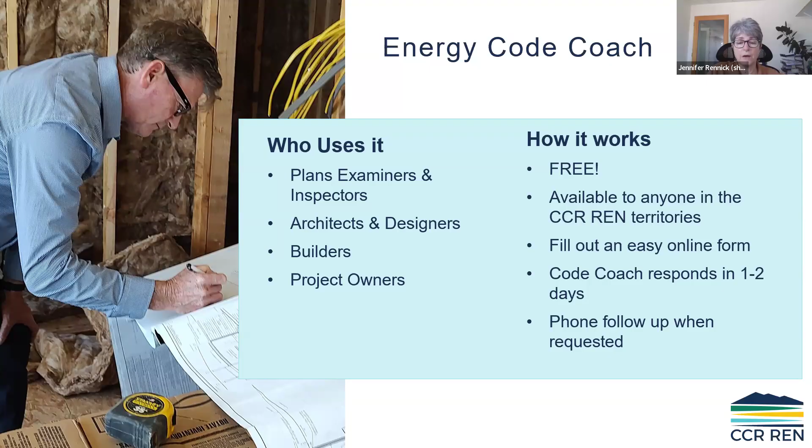And one of the ways we do that is through our Energy Code Coach program. And that Code Coach program is available to plans examiners, inspectors, architects, designers, builders, project owners, including homeowners and the general public. It's completely free and it is easy to use. You fill out a form online. I'll have a website link at the end of the presentation. Then we'll respond back to you in 1 to 2 days through the Code Coach service. And we can also do a phone call follow-up when requested.

This service is available because a little bit of your ratepayer dollars, when you pay your electric utility bill, goes into a pool of money that then is distributed back to each of these regional energy network service areas to provide education, outreach, and support on the energy code as California moves towards reducing its energy impact and reducing pollution for the greater good of California and the adjoining states, and a little bit of Mexico and a little bit of Canada as well.

Today, we're going to cover accessory dwelling units and give you an overview. Then I'm going to go into the California Energy Code and specifically some of the big picture code review. Then we're going to talk about energy code measures that are applicable to new construction and additions, alterations, with a focus on how that might impact your ADU or junior ADU project. And then I'll wrap up with some additional resources.

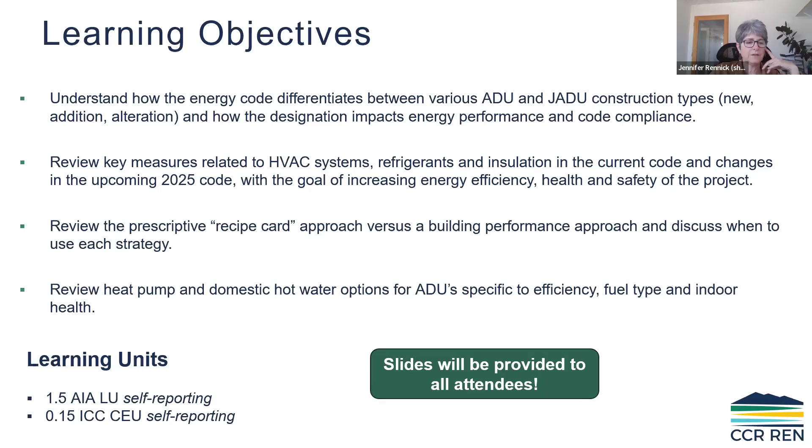Let's see, before we dive into the overview, did anyone put in the chat if they were architects or just interested in ADUs? What did we find out? Yeah, we have 1 design professional and we have 4 jurisdiction staff.

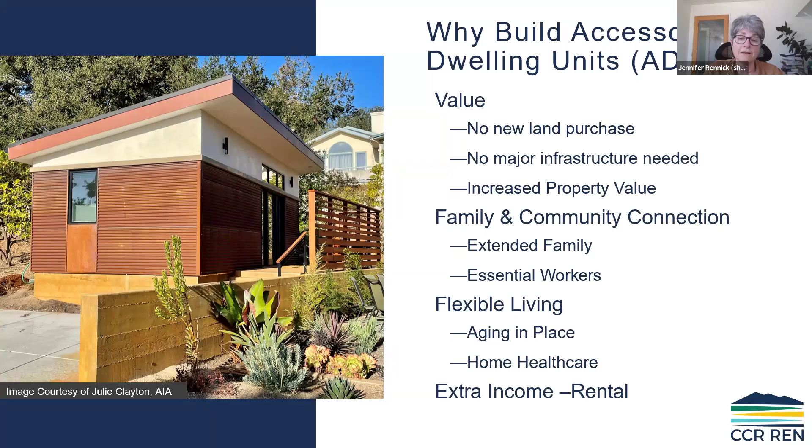Okay. So in general, and you all may know this, a lot of times when we're interfacing with the general public, a lot of the reasons they want to build ADUs is because they don't have to purchase new land. They don't have to have new major infrastructure. It increases their property value. A lot of times folks want additional rental income, but we're seeing more and more people just need an affordable way to live for their extended family. And sometimes they need a flexible living space because they're aging in place.

And as most of you probably know, California adopted legislation to address our housing needs. So California Code, beginning January 2025, mandated that all jurisdictions have pre-approved accessory dwelling unit plans available to the public. And SB 9, housing development, allowed for a second primary dwelling unit and allowed qualifying properties to be subdivided. So what that really did in the end was for certain properties, you could end up with 4 dwelling units total. So the state is looking for ways to help people build more affordable housing, is what this really comes down to.

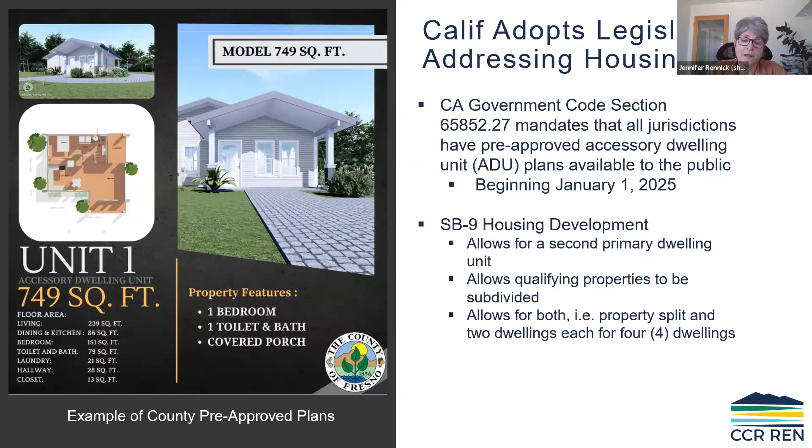So this is an example here from County of Fresno for their pre-approved plan sets. And there's a lot of resources available. What I have found is some cross-pollination between jurisdictions, but also for the design professionals. I found it helpful to take a look at what some of the other counties or cities have put together just as resources. So for example, Kern County, they have 8 pages of required code notes that folks should put on ADU plan sets. And so Kern County has made an effort to streamline that process and get these notes up front and out there for the people that are building it, and also for the homeowner and everyone involved to know what's going to be really required for that ADU.

And of course, there's a great ADU accessory dwelling handbook. It was updated January 2025, and you can get that on the hcd.ca.gov website.

So California Energy Code, to put this in perspective, big picture, in the California Code of Regulations we have 28 titles. Title 24 is the Building Code Standards. The Energy Code is Part 6. It's just one part of it. But when it comes to ADUs and housing, Title 20 plays a part with the efficiency standards for our appliances, and Title 25 can play a part with housing and community development if folks are buying pre-made factory-built ADUs and having them craned in, for example.

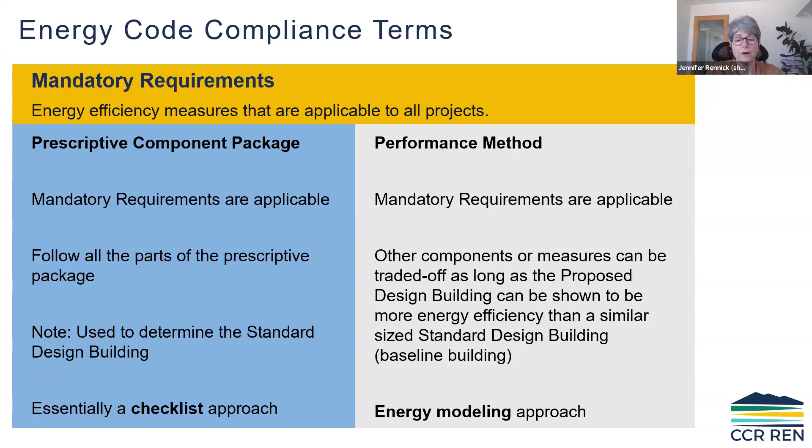When it comes to the ADUs, if it's a pre-approved plan set, all this has been figured out. What we're seeing is some homeowners wanting to change things and then being surprised that they're being asked to find a Title 24 energy consultant to update or create a new Title 24 Part 6 plan set for them.

In the rural REN, Central California Rural REN regions, we have multiple climate zones. A lot of times folks will look at pre-approved plans, and depending on where that plan set comes from, they're supposed to use the one that's in their jurisdiction, but maybe they're getting ideas from other plan sets. We've seen this in some of the other RENs, that they're surprised to see those requirements. A lot of times it's because the energy code itself is climate specific.

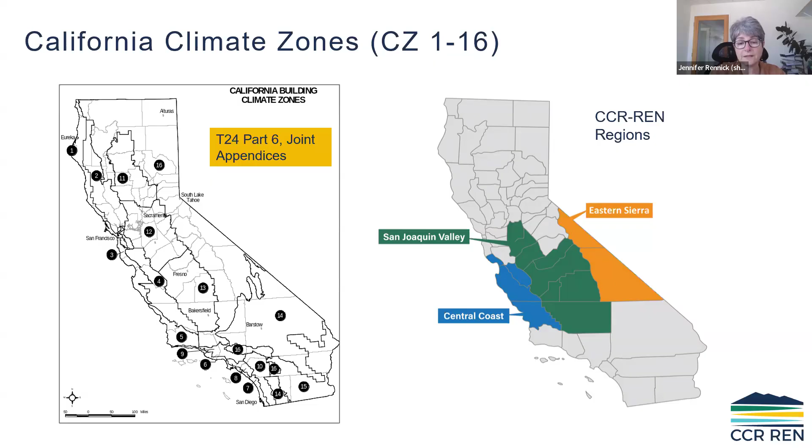In California, we have 16 climate zones. In our rural REN, we've got climate zones 3, 4, 5 down in the San Luis Obispo area, 12, 13, 14, and 16. So many different climate zones, and we're going to have a variety of solutions across each of those counties and cities within this region. If you're not sure what climate zone a project is in, there's a great California climate zone tool where you can type in the address, and it will tell you exactly what California climate zone you're in.

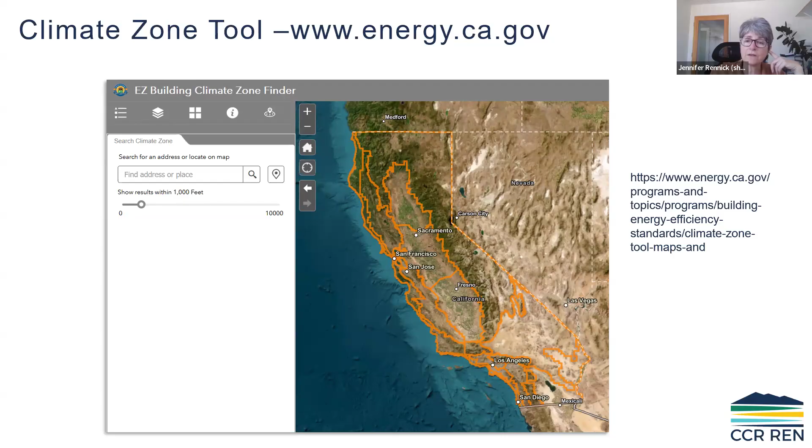For ADUs and junior ADU designation types, that does make a difference in terms of how the energy code applies. By definition, an ADU, accessory dwelling unit, is a complete independent living facility. It has permanent provisions for living, sleeping, eating, cooking, and sanitation, i.e. bathroom. The ADU has to have a separate bathroom facility and a separate kitchen, which can be an efficiency kitchen or a full-size kitchen. It has to have its separate heating, cooling, and ventilation system. An ADU may have shared hot water with the main residence or have its own hot water source.

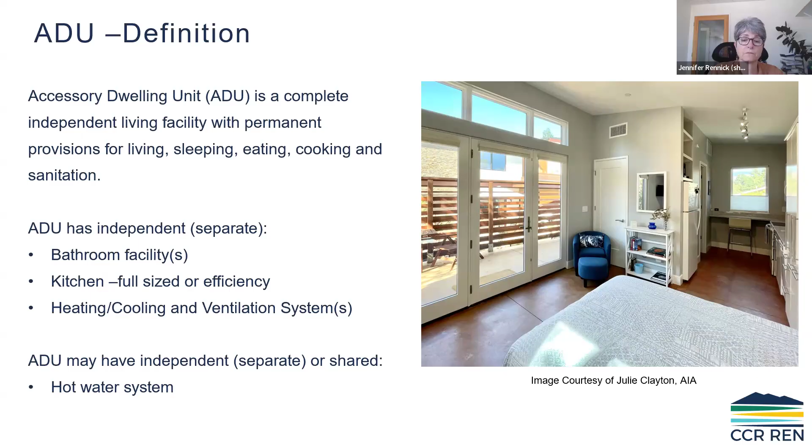A junior ADU, on the other hand, is a living and sleeping space that's no more than 500 square feet, but it's contained within the existing or a new proposed single family residence. It has to have its own kitchen, full-sized or an efficiency kitchen. It has to have its own exterior entrance door, but the big difference is that a junior ADU can share a bathroom facility with the main house. If that's true, it needs an interior access door, and it can share the heating and cooling systems and share the hot water systems.

Just as a reminder, the efficiency kitchens do need to include plug-in cooking appliances, a space for refrigerated food storage, i.e. a refrigerator, and adequate space to actually do the food preparation.

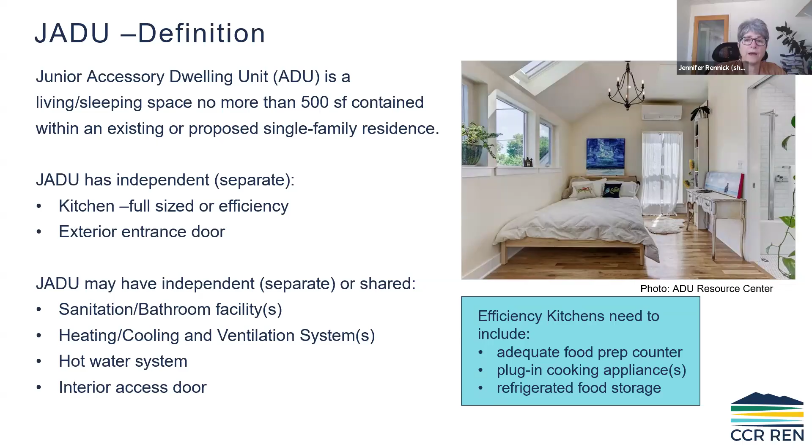Now, in the language of the planning departments, policy and housing regulations, ADUs and JADUs have some common configurations that are talked about. So a lot of the cities and counties have adopted these diagrams that were put together for many of the jurisdictions. And we have a detached ADU, new construction. Okay, great. You could also have an internal JADU that's a converted attic, or it could be a detached ADU that's a garage or shop conversion.

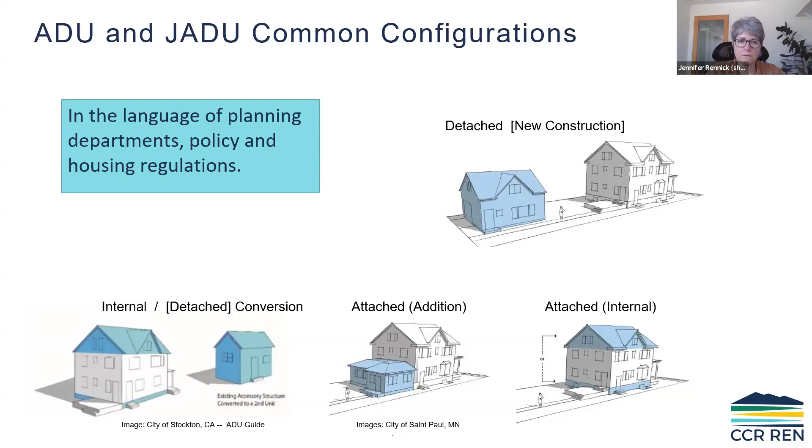So that's how those words are used for planning departments, but in the language of the energy code, a detached ADU that you're building from scratch, that's new construction, just straight up new construction. And so all the things for new construction apply, including PV solar requirements.

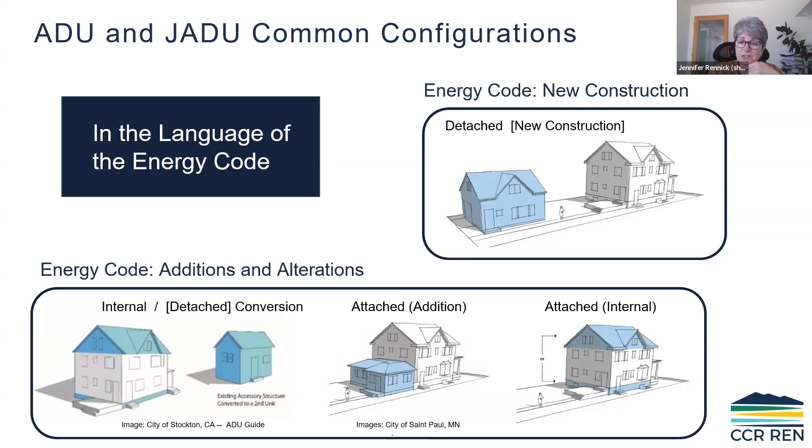The other ways of looking at the building for ADUs, all of those other types, whether conversions or additions or remodels or retrofits, whatever the word you want to put to it, all those types are going to fall under the additions and alterations part of the code. And the requirements are different for each of those.

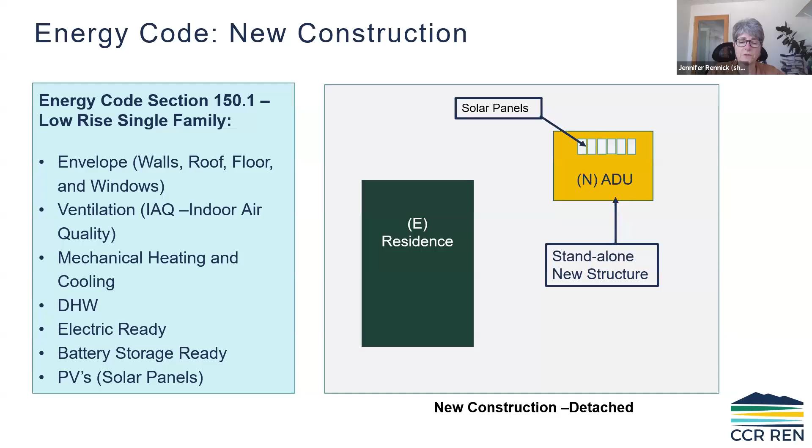So for new construction ADU, there are going to be wall, roof, floor, and window requirements that are slightly different than the additions, alterations. They're going to have an indoor air quality or outside air ventilation system, mechanical heating and cooling. They have to comply with the electric ready and battery infrastructure storage ready requirements, and PV panels could be required depending on the size of the ADU. So we'll review some of those key things that impact ADU for new construction.

And then for the additions, again, even if it's new to the homeowner, if it's an existing structure on the property, like a detached shop or detached garage, and it's converted to an ADU, even though it's not touching the main house, that's still considered an addition under the energy code. And of course, you could just do a straight up addition onto the house, or you could convert a connected garage, and those are still considered additions.

So they have slightly different wall and roof requirements. The ventilation requirement for outside air depends on the size of the addition or the ADU. And you can include a second water heater with that if you want to have the new ADU have its own water heater source.

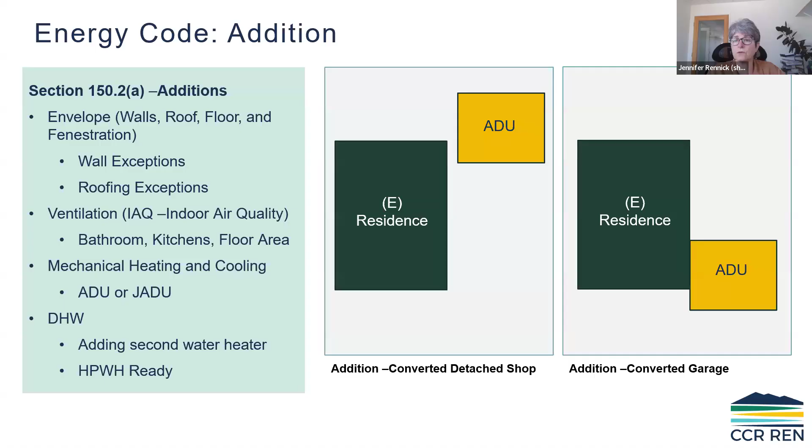Jennifer, one quick question I see in the chat from Tyson. Do junior ADUs require built-in cooking appliances? Plug-in type appliances is how the code reads. But it needs to be appropriate for cooking. And it has to be permanent. So the facility is supposed to be permanent. Does that answer the question? You can use plug-in type.

So I've seen now for the ADU and junior ADU market 2-burner induction cooktops, both a plug-in type, but also a built-in the counter. So it's very narrow and only has the 2 burners. That seems like a really good solution for that. That's readily available at like Ferguson's supply houses.

And then refrigerators are getting more compact, so it doesn't have to be a teeny tiny under the counter refrigerator where you can hardly store any food, but they do make them like 3/4 size now, also readily available with inverter motors and sleek design. So there's some options.

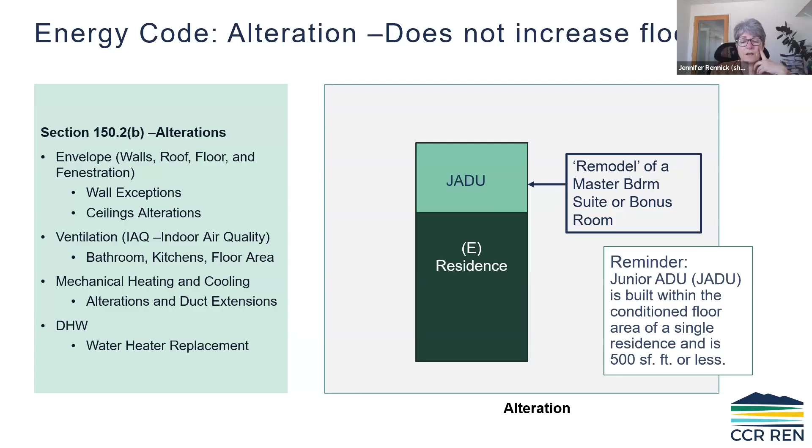But when we do that now, the energy code is only looking at complying with alterations to those walls, ceilings, windows, and domestic hot water, et cetera. If you wanted to, you could do a water heater replacement for the whole house that includes the junior ADU and help offset some of those other features that might come up in an alteration under the performance method. So there's a variety of ways to do that as an alteration.

For new construction, so when we have the standalone detached project, new construction, that ADU does have to comply with electric ready infrastructure. And this only kicks in if the homeowner is wanting to install propane or gas appliances or water heater or furnace. If they choose to do so and they're complying with the rest of the energy code, then the energy code says you have to provide space in your electric panel, or at least designate that, and

you have to supply the electrical infrastructure in order to be able to convert that water heater space to a heat pump water heater, the furnace to a future heat pump installation, your cooktop to a future induction or electric, and dryer to a future electric dryer, of which there are several types: induction, ventless, and your standard vented electric dryer are all possible.

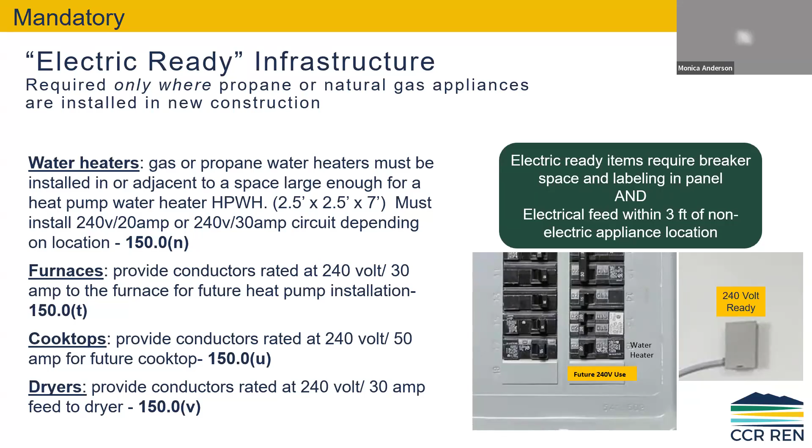Now, along with new construction, you don't have to install a battery, but the infrastructure for future battery energy storage is required. And we get this question that comes up a lot, and so I probably can't say it enough, is it doesn't apply to the additions and it doesn't apply to the alterations. So this is why also how the energy code looks at your ADU project is important, because of these different regulations.

If you do choose to install a battery, however, you can forego the required infrastructure requirements. If you don't install the battery, then the required infrastructure is something that's going to show up on that plan set. And I put kind of the highlights of these code requirements here for you. You'll get a copy of the slides just to make it handy so you can refer back to it.

But probably one of the main things that comes out of this that we hear from people is that they are wondering now if they have to have a new electric panel on their ADU that's 225 amps, even though they don't think their ADU is going to ever need a panel that's 225 amps. And so I have a slide coming up, and there is an answer to that question. The California Energy Commission clarified where you could actually put the new panel requirement on the main house and put a smaller panel on your ADU if you want to.

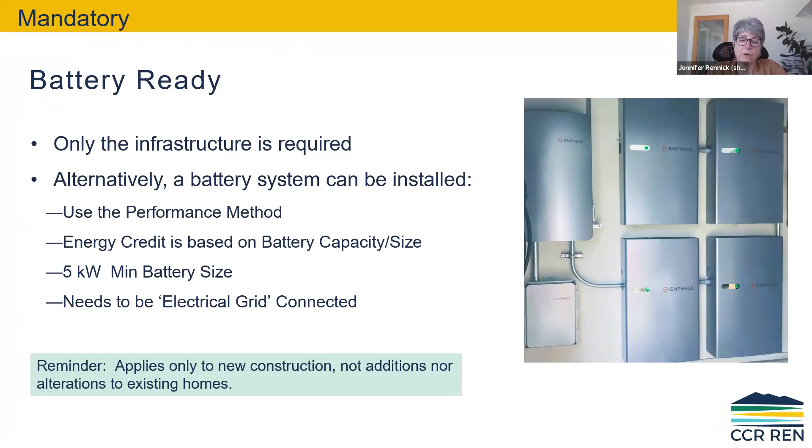Oh, I think the other big thing that comes up is trying to better understand what do they mean by sufficient space for the future transfer switch. I'm going to go back a slide, and that's because even though, like in this photo here, you see a number of Enphase batteries, the battery system itself has a transfer switch, has the controllers. Those are the smaller units to the left of the 4 batteries, and it takes up space. So the architects typically need to look and design for that and give themselves several feet wide and at least 30 inches tall for that future transfer switch.

The PVs are required. There's a formula that you can use to get your prescriptive sizing requirement. And even if your house does the performance method, you're going to be compared to a house that has this prescriptive requirement. So we often suggest to the architects and the homeowners that if they can't do the math themselves, to get some help with the math and help them figure out how much space they're going to need for their solar panels.

But for example, if you have a 750 square foot ADU in climate zone 13, so like Bakersfield area, you're going to need a 2.18 kilowatt system. Let's say your panel's 380 watts, that's 5.7 panels. You're going to round up to 6, so you need 6 panels, and then you can have an approximate panel size and start to lay it out. If it turns out that your ADU has a requirement of less than 1.8 kilowatts, you don't have to install the PVs, or if you can show that you don't have an adequate solar access area, also known as SARA. And if that is less than 80 square feet, you don't have to do a PV.

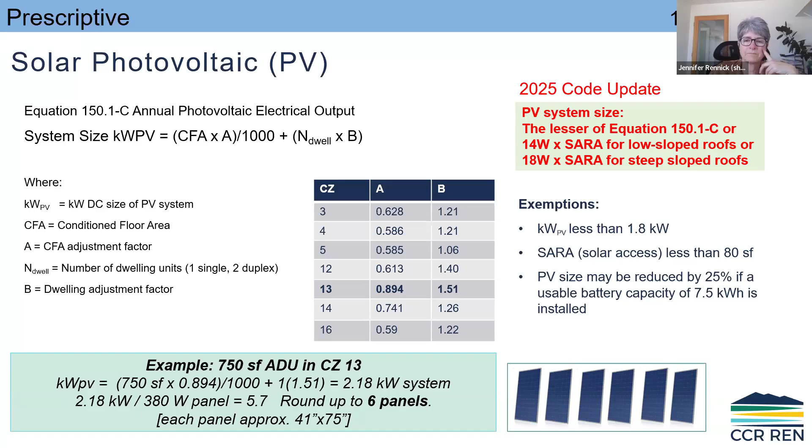And if you install a battery of 7.5 kilowatt hours or larger, you can reduce that PV size by 25%. So the 2025 code update, though, does include that equation, and you can also take what that solar access roof area is. You could get help figuring out how to determine what that is, and then multiplying that by a set wattage and choose the lower of the two PV sizes. So far we haven't had anyone inquire about that. I think it might come up, but ADUs typically are small enough that folks are really just wondering how big their ADU needs to be to not need the PV requirement.

So it depends on the climate zone, and it depends on the size of the ADU, whether that's going to kick in. Just to give you an idea of what that might look like, let's say you've got a new house, 1,200 square feet, Fresno, Bakersfield area. So if you had 320 watt panels, you might need approximately 8 of them for that requirement in that area. And if you are trying to get a handle on what that covers for the house's needs, typically it's about 40 to 60% of what the home would typically use.

So if you're trying to go for zero net energy, you would add more panels. If they are going to have an electric vehicle to plug in, and you wanted the project to be really independent of the grid, you'd need to add another grouping of panels. Or if you took that battery credit, installed the battery ahead of time, you could reduce your PV load by 25%. So then you would need only 6 panels and 1 battery potentially to meet the code. And then in 2025, they've updated what's called the self-utilization credit, meaning how we calculate and define that battery being used specifically for that house. And there's additional credit coming up in the new code.

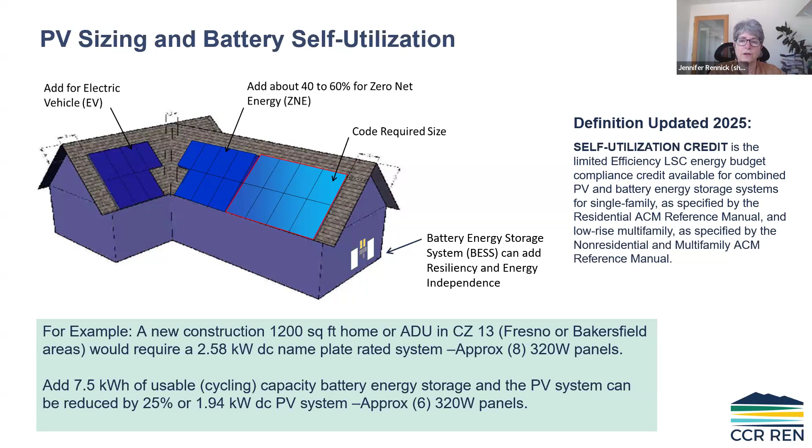A note on the exemption for under 1.8. We're seeing, so in the modeling software, it's really easy to select that, and it doesn't really notify or have many double checks against it. So we're seeing a lot of jurisdictions requesting to see the calc or some kind of evidence that the project actually is eligible for that exception, because it's really simple just to select the button and say that you're exempt. Unfortunately, that puts the onus on the plans examiners. So different jurisdictions are handling it differently. But it is something that continues to come up that we've seen across the state.

Good point. So yes, that is a really good point. And so that formula can give you an idea of what that prescriptive requirement would have been. And sometimes in the performance method, you'll get a slightly different size. You can also ask the consultant to not click that button and see what size shows up and have two reports, but it's probably easier to use the formula. Yeah, our recommendation is either to ask to see it when you see the note on the report saying that it is exempt, or some jurisdictions are just doing it themselves as a double check internally. Yeah, good point.

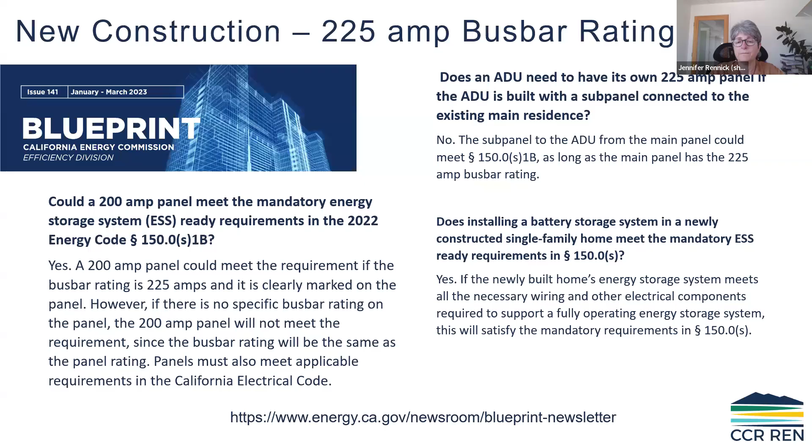And that also works. And then sometimes you'll see a situation where the panel is nominally called a 200 amp panel, but the markings, the actual ability of that panel, could technically accommodate 225 amps. So that's acceptable as long as it's clearly marked. And so again, you can see that on the job site and see it on the equipment. But otherwise, basically a 225 amp panel is where you go with new construction.

Now that kind of takes care of the infrastructure, PV, battery side of it, all new construction. Now we're going to touch in on some of the envelope features, just to give you a rundown of what is required for the ADUs and give you a little bit of heads up on what's coming up in 2025.

For the most part, the only thing that changed a little bit is some requirements for walls and windows. But for the most part, your attics, your roofs, that part of the code is going to stay the same, other than certain climate zones got a little bit of an upgrade. And those 8, 9, and 10 are not in our rural region, but it's there just as a heads up. So no big change for our area.

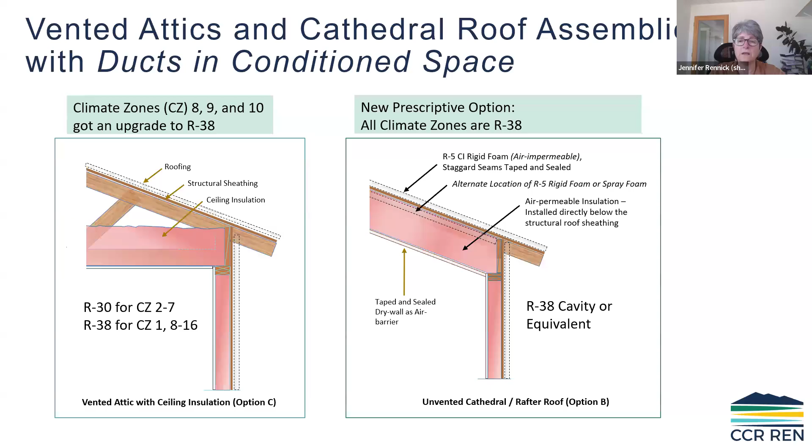And then all the climate zones now are getting a prescriptive option to do an R38 cavity or equivalent roof. So that could be a bit of a benefit if just that cathedral roof was what was stopping you from using a really straightforward prescriptive method.

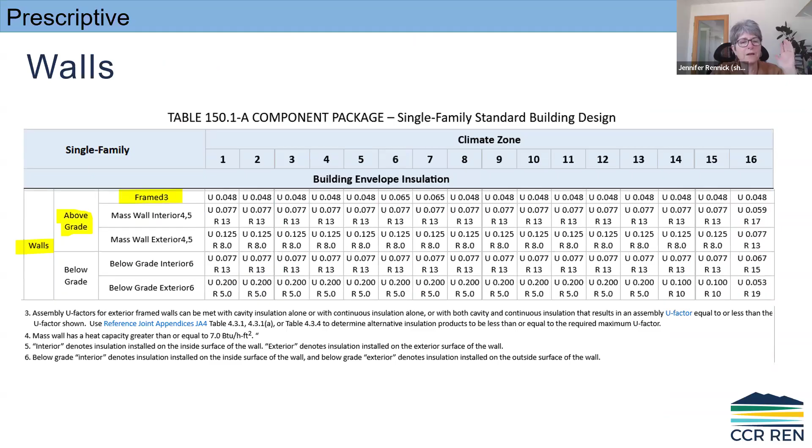For the walls, how we as energy consultants deal with this on the prescriptive: we take a look at a table that looks like this, and we enter this table and we say, okay, we're going to look at walls above grade that are framed. Then we take a look at our climate zone. In this case, we're looking at 3, 4, and 5, 12, 13, 14, and 16. And we see that a U factor for that is required.

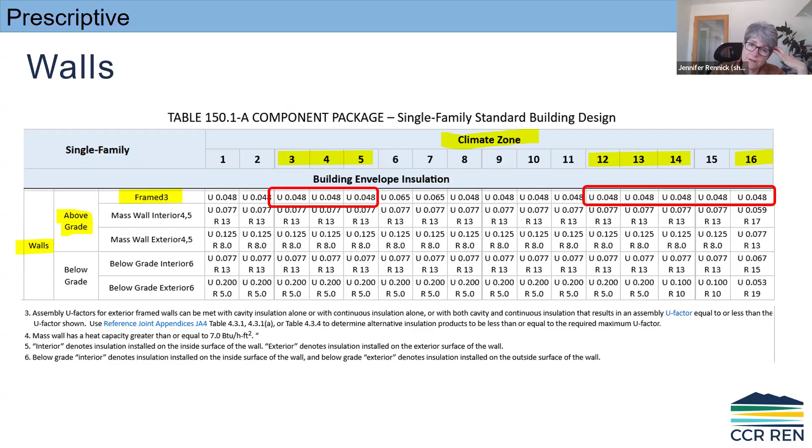Okay, a U factor doesn't really translate into an actual acceptable wall assembly, but there's another place in the code we can go to called the reference appendices, and also there's a handbook that goes along with all these code requirements. And we can look up a table of typical wall assemblies and what their U factors are. So it starts out with your stud size, assuming 16 inch spacing, what the cavity insulation R value is, the type of insulation, and whether you need exterior wall insulation.

Well, it turns out in order to meet the 0.048 U factor in the previous table or less, and with U factors, the smaller the better, from this chart there's 3 types of wall assemblies that make it, and they're all 2x6 framing. They all have at least an R19 cavity fill, and they vary between R5 and R6 exterior continuous insulation.

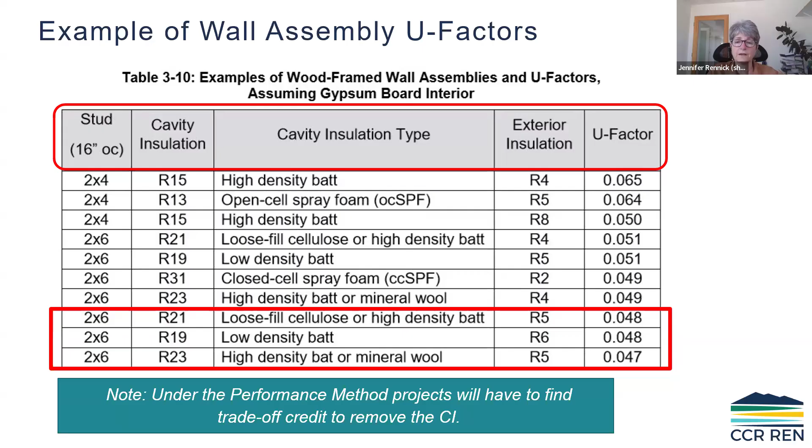And what we're seeing is that a lot of jurisdictions are getting plan sets where the builders are trying to avoid the exterior insulation. And if they do that, they automatically are going to have to use the computer performance method. But if they want to continue with prescriptive, they could follow these guidelines and make sure they hit a U factor of 0.048 or less.

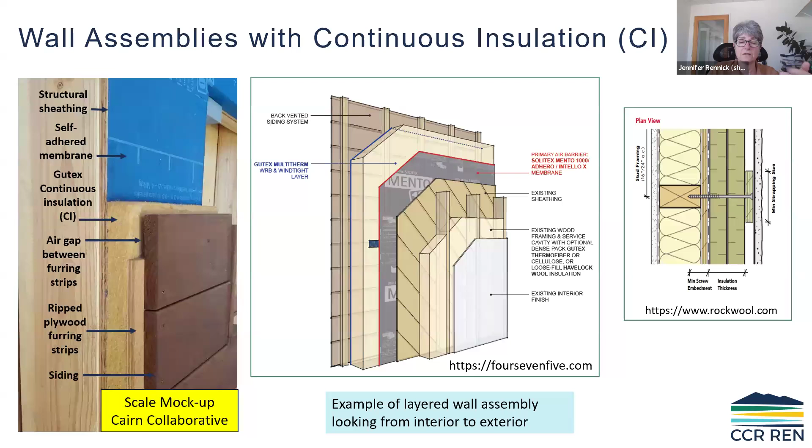And there's a lot of resources now available for how to detail your project with the exterior insulation. Rockwool is a common exterior insulation material, and on their website they also are showing details. And same with foursevenfive.com, which sells a lot of the products that make it easier to build to the new standards, also including passive house standards.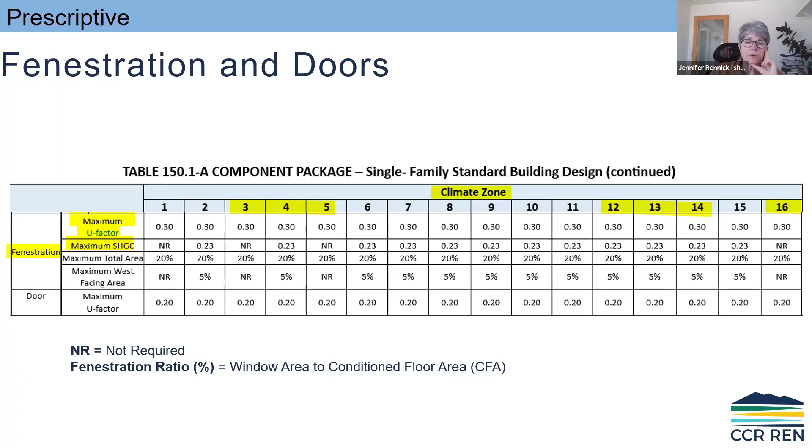For 2025, those window requirements are getting updated. So for most of the regions we're working with, our solar heat gain coefficient won't change, but the new U factor got smaller, 0.27. So now the windows need to be more energy efficient.

The other thing I want to point out, and this comes up especially with the ADUs and small houses, is that prescriptively, you're only allowed to have a percentage of the total conditioned floor area be window area. And for some of our climate zones, like 4, 12, 13, 14, only 5% of that conditioned floor area is allowable to be west-facing window.

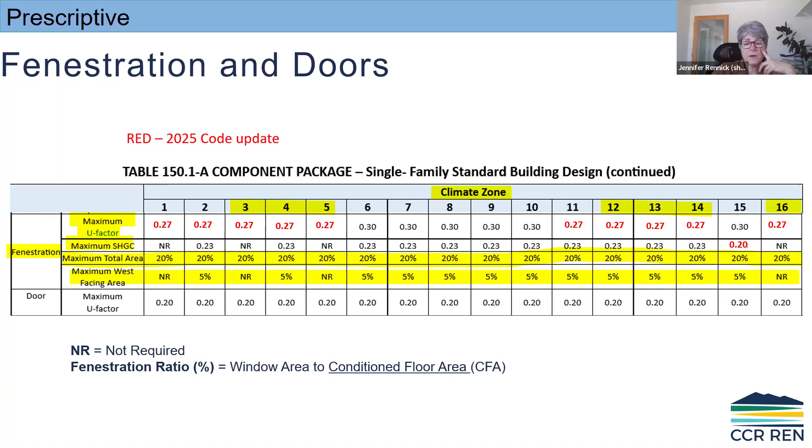I bring it up because we have projects now where folks really want to just meet their ADU prescriptively; it's easy, straightforward. You don't need specialized performance calculations, but for a small conditioned floor area, they also aren't getting as big windows as they would like, which then kicks them into the performance method category. Just a heads up for everyone, under 2025, the window requirements are changing.

There also is a new update, and there's an exception to what the mandatory maximum U-factor could be. It was 0.45 max, which is much more than those prescriptive requirements. So you would have to use the performance method if you're trying to just meet that mandatory maximum. That has dropped down, but there is an exception, and that is for projects located in high fire hazard severity zones or the WUI fire areas.

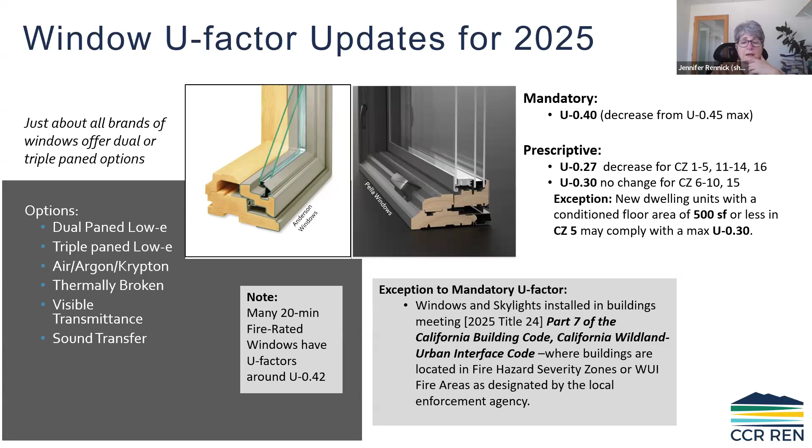And this is key because now the windows may not perform as well as expected in the energy code, but there's an exception because most of the 20-minute fire rated windows have U-factors around 0.42. So even some of these aren't going to meet this new mandatory maximum. So you have to not only look for a really good fire rated window, you're also going to have to do the performance method. That could change some of those plan sets that are already pre-approved when the 2025 code comes out.

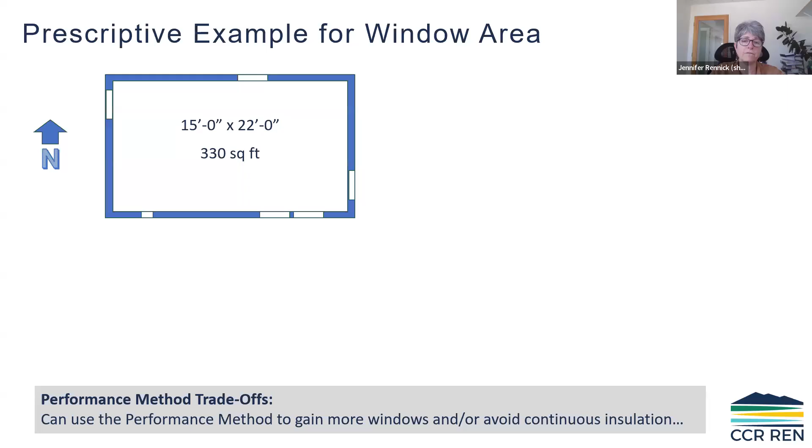So to give you an example, just to put the numbers to what the code means. Let's say you have a really small ADU. It's only 330 square feet, but it's new construction. We've got our 20% window to floor ratio, which means only 66 square feet is allowable for the window. And let's say this is in climate zone 12, so we can only have 5% of it west-facing glass.

So in this little example, let's say we've got 3 windows that are 3.5 by 5, a 3 by 3 window above a little kitchen sink, a 3 foot by 1 foot window on the west side for their little bathroom, and then we can add a little 1 by 1 window for fun. These windows I took from one of the plan set ADUs from one of the jurisdictions, just to use as an example.

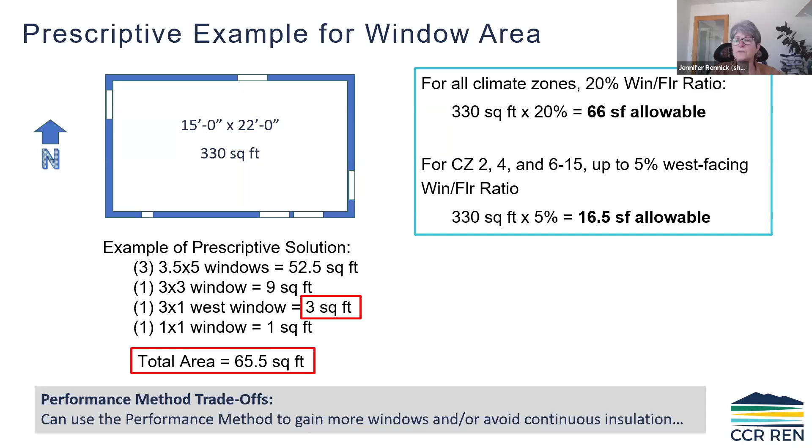And we've got a total of 65.5 square feet, so it just meets our 66 square foot allowable. And the west window is only 3 square feet, which is less than 16.5 square feet. So we're good. And if you want bigger windows, then your project automatically has to go to the performance method. So that fits the new construction.

Additions are similar for the windows, but when it comes to the walls on additions, there are some wall exceptions, and there's something called a wall extension. When this new wall is directly in line with the existing residence, you can avoid the continuous insulation and just fill that cavity with an R15 if it's a 2x4, or an R21 if it's a 2x6.

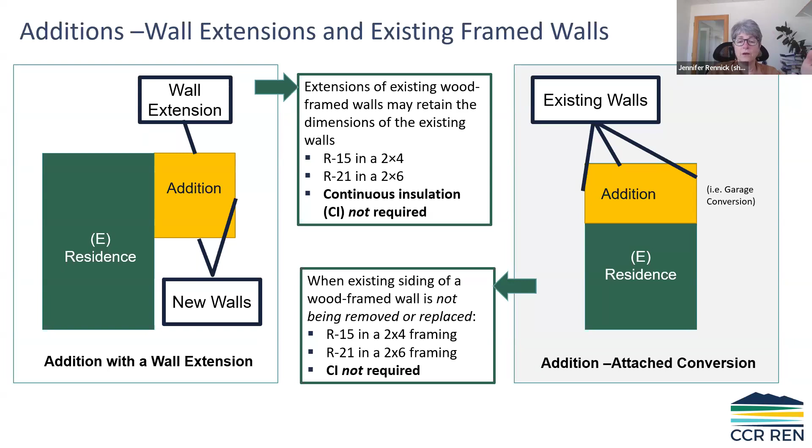The new walls, however, are going to be compared to a wall with continuous exterior insulation. So this is again where a lot of folks don't want to have walls of different dimensions, and they're hoping to keep the walls the same as what's existing. So they would engage in the performance method for that.

An example of this: this was an image that CEC Blueprint had created to explicitly show what this code requirement is. They show a new wall that's not an extension and a new wall that is an extension, just to clarify when that continuous exterior insulation would be required. Excuse me here.

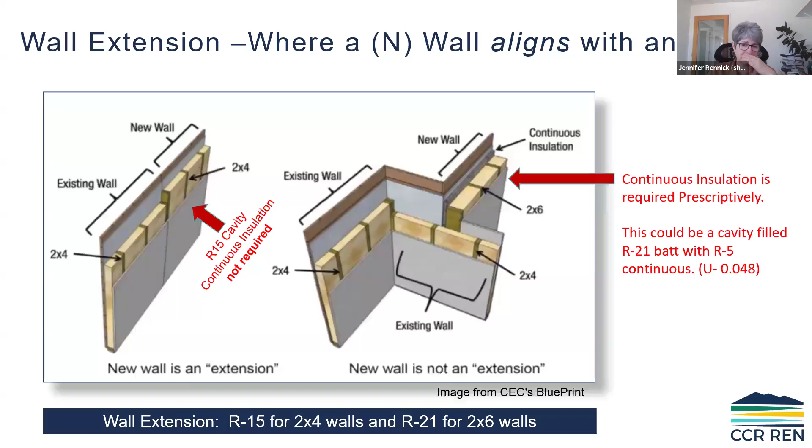While I take a sip of coffee here, do we have any questions or anything about the walls or wall extensions, or even any comments on what you guys are seeing in your jurisdictions? Would be super interesting to us. Yeah, we're always looking for topics and pain points so we can find the content or resources that people need more of. Yeah, it's true.

You know, so the alterations kind of world of it, the existing walls, when you alter those walls, let's say you're going to replace some of the windows, or you just want to upgrade the windows as part of that alteration, and perhaps you took an existing space and now you're going to convert it to a junior ADU. You just have to fill the framing back with an R15 if it's a 2x4, or an R21 if it's a 2x6 wall. So fairly straightforward there.

And then there's requirements on the window replacement if it's less than 75 square feet. Your solar heat gain coefficient is based on climate zone, and the U factors are also based on climate zone. Now, for window replacement under 75 square feet, those U factors are more generous, and the solar heat gain coefficients are more generous when you're only replacing a small amount of square feet or skylight.

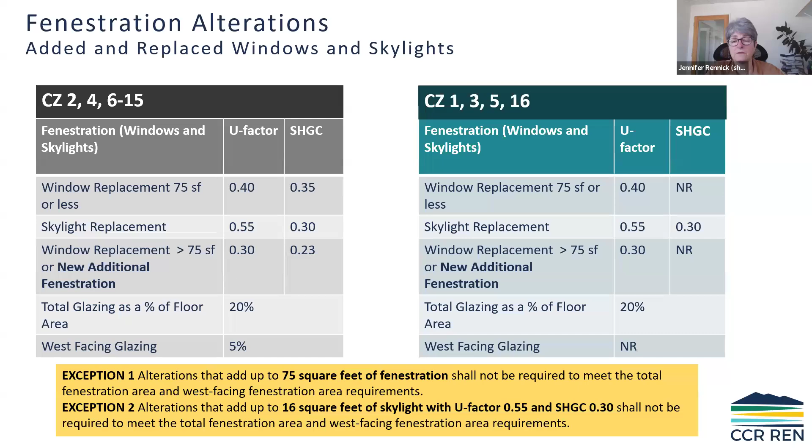But if you do a spray foam up on the roof deck, closed cell spray foam, a couple inches, and then you fill the rest of the cavity, then you can eliminate needing that roof ventilation. And the energy part of the code doesn't explicitly lay out which detail. It just nominally says that whole assembly, if you want to do a cathedral ceiling, you just have to make sure it all adds up to an R30. And that's a really common question we get. That's the reason why Jennifer had that ready right away.

And it seems to be pushing towards using spray foam as the solution for that requirement. Do you have insight on if someone didn't want to use spray foam? Yeah, there's different ways to detail it. Let's say you want to use a blown-in cellulose product, a great way to do it. I think we can include some of those details in an upcoming course, or you can definitely contact us in the code coach and we can help you, because it pulls in both the residential code and the energy code, and it's all about air permeability.

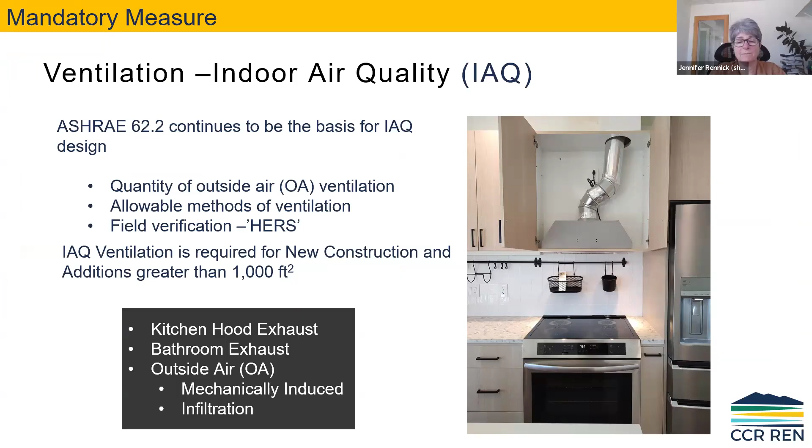So it's kind of a heads up. You might just warn folks ahead of time that maybe they just need to get the hood and put the microwave someplace else. But we're actively going through this with the project, and this is a pain point.

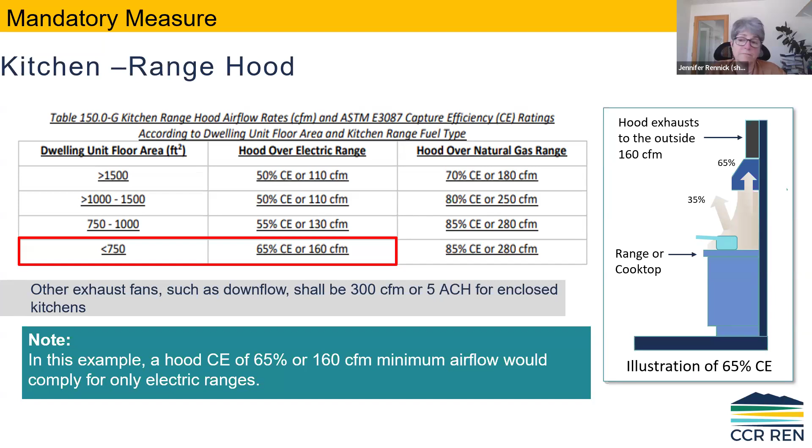And then also to have it be quiet enough, because the code requires that they meet their CFM at 100 CFM at 3 sones. So it might be a multi-speed fan, but a lot of the research has also found that if the fan is too loud, people won't use it. So it's a combination of both these things.

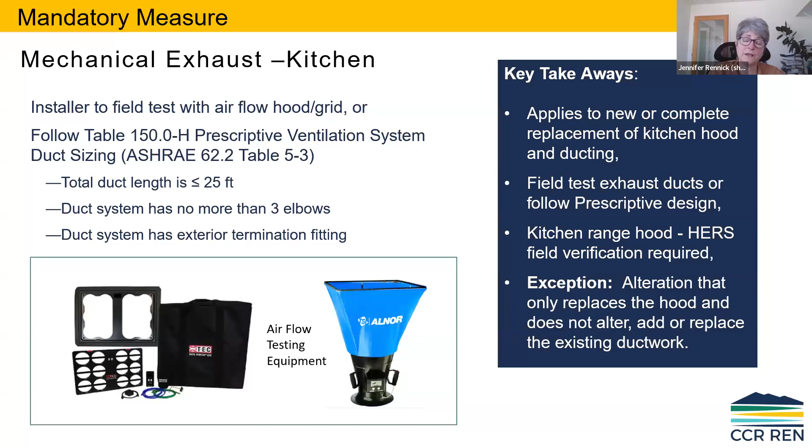When it comes to the mechanical exhaust, you would have to have it field tested to show that it really is pulling the CFM through that unit, and CFM is cubic feet per minute, or you can follow a prescriptive design. In other words, you could show that the duct is less than 25 feet linearly, doesn't have more than 3 elbows, and has the proper exterior termination fittings. So the takeaway here is that with the small ADUs, the kitchen hood is becoming a pain point.

The rest of the indoor air quality ventilation for just bringing outside air into the space is based on an ASHRAE formula. And I put this formula here because it's a good one for folks, especially the designers, to be able to calculate this and get an estimate of what's ultimately going to be required for fresh air. Technically, you could do a more sophisticated calculation and subtract from this the amount of air leakage through the envelope.

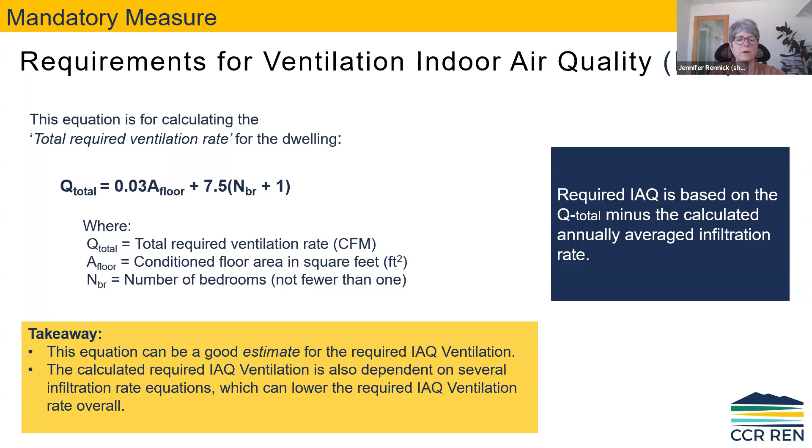But if you're building a tight house in the first place, you're not going to have much air leakage through the envelope. So we recommend just meeting this formula and then you're done. But also with the ADUs, and in the attempt to make them more comfortable, less air leakage, and recommending that they be built tighter, we are recommending balanced ventilation for those spaces.

And so the balanced ventilation could be that you have your bathroom exhaust fan wired to a supply fan. And then you set those two to run at a low CFM continually, of course, with the ability that the homeowner can turn it off if there's really poor air pollution outside. And then this whole thing would have a HERS rater come out and take a look at it.

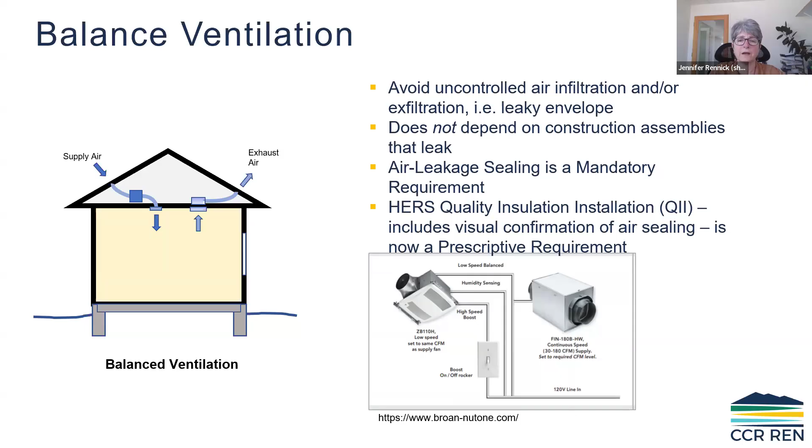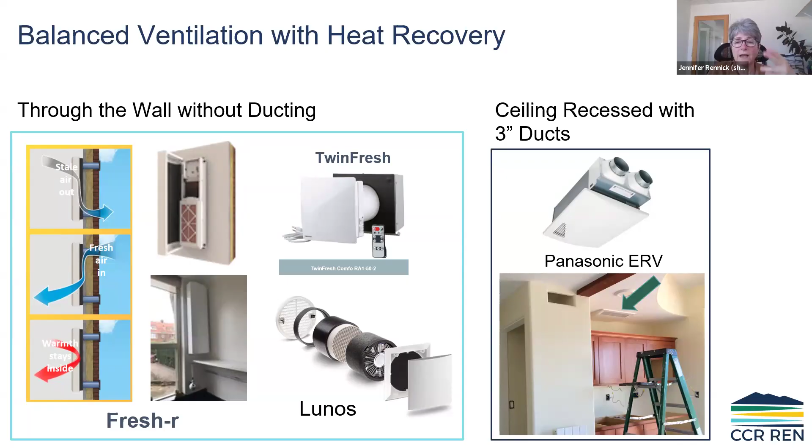There's also some other really small compact solutions that have heat recovery, and Lunos is one brand. TwinFresh is another brand that's becoming available. Those don't have the HVI rating, so you're not going to get extra credit for the heat recovery, but even though they come with heat recovery, you can use those to meet your outdoor air requirements. And then Panasonic makes a fairly compact one that would fit up into the recessed ceiling that you create, and has 3-inch ducts coming off of that.

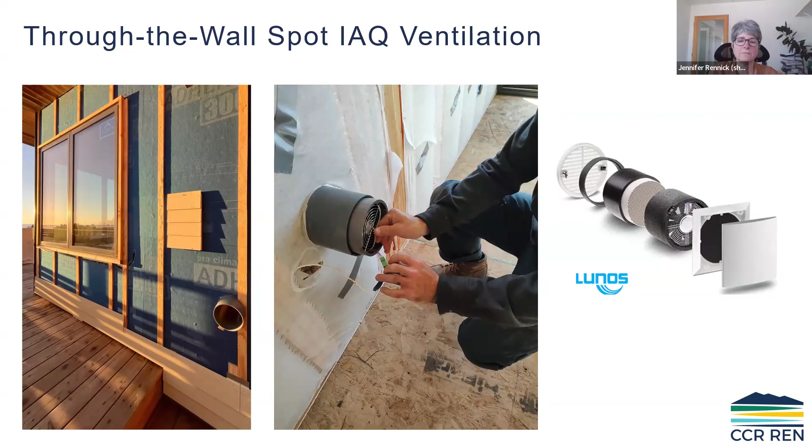And this is what those through the wall or kind of spot IAQ ventilation systems look like, with this canister with the blower, a filter, a heat exchange ceramic, and then your outdoor grille. They work in pairs. This is kind of what it looks like as it's being set up through the wall assembly. And then on the outside of the house, you'd see a small louver, and on the inside of the house, you would see caps and covers.

In this particular room, just the way everything was set up, the two Lunos are close together, but in other situations where you have a little more flexibility than this particular home did, you would separate those two units. But that gives you an idea of what it looks like on the interior.

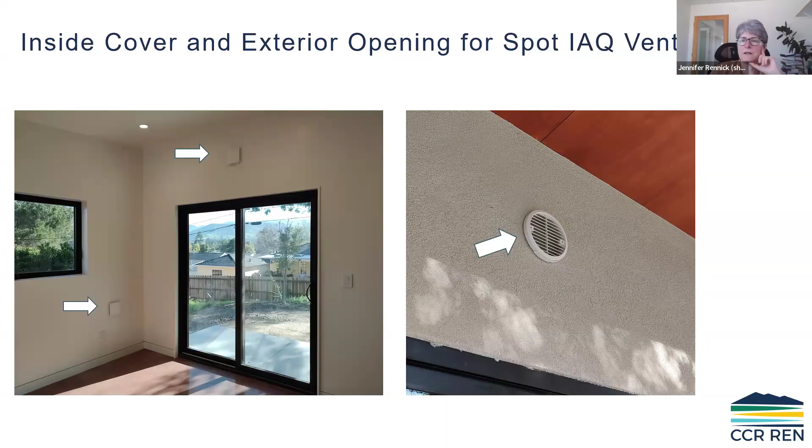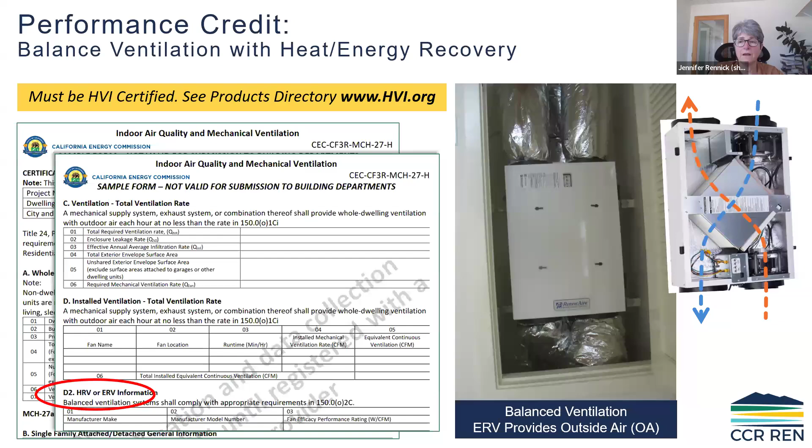And then for a more robust solution and for the larger ADUs, like your 1,200 square foot ADU, you could use an HVI certified product that has the energy and heat recovery system, but it does require you design a small closet or access to it to get to the filters, to get to the heat exchanger, so you can do maintenance, clean it, diagnostic controls. But if you go this route, under the performance method, you can take extra credit for it, which could help you offset maybe the exterior continuous insulation you don't want to install.

That's usually what we're seeing in a lot of the areas, is folks aren't quite sure how to detail the exterior wall insulation, so they're looking for ways to use the performance method to not install it and do other ways to save energy. And the energy code is fine with that, because in the end it saves energy no matter which way you do it.

With water heaters, right now for your ADU, you can install a heat pump water heater. You can install a non-electric demand water heater. And these are prescriptive requirements that are allowable. If you don't fit into one of these climate zones, you want to do something different, again, you go to the performance method. But the 2025 code update is basically eliminating your instantaneous water heaters as a prescriptive pathway, and you're just going to do heat pumps. You could still install it, but you do the electric ready and you do the performance method.

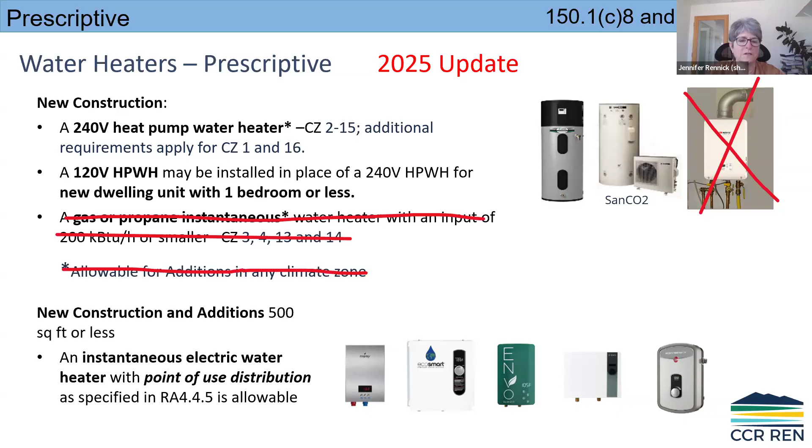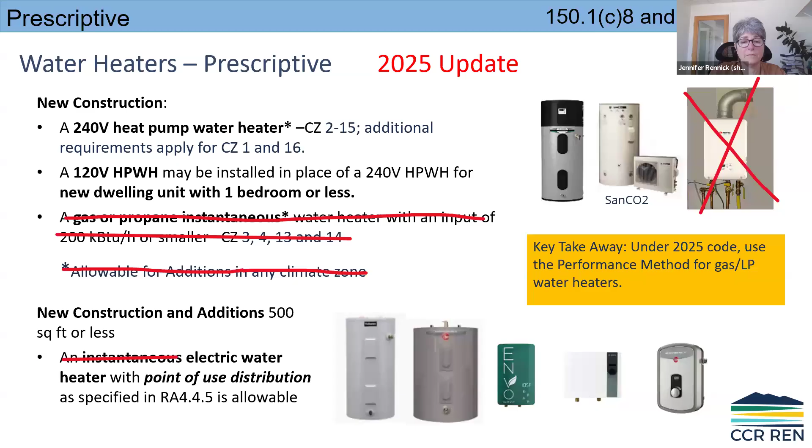And then for really small ADUs or additions that are 500 square feet or less, well, small compared to a new house. I mean, it's still 500 square feet. It's bigger than most people's garages. You can do the instantaneous electric water heater with a point of use distribution, but new to the energy code in 2025, it can actually be a small tank type electric water heater for those small under 500 square foot additions.

The point of use requirement, though, is very... I mean, when they say point of use, it's point of use. And so in order to comply with this, you would follow a line size versus length for each run to the appliances. So I tried to give you a little diagram of what that would look like. And further, from a plans examiner side of it, your architect, you want to put an actual dimension on this, because on the plans examination, you're going to look at this and see that the water lines from your instantaneous water heater, they're usually 3/4 inch thick.

You're going to put it immediately into a manifold that makes it smaller, so that you're only sending a 3/8 inch line out to the sink. And then in plan view, that sink can't be further away than 15 feet from your appliance. And the shower isn't to be further than 10 feet, and your washer dryer not further than 10 feet, assuming you're going to use a 1/2 inch diameter piping, typical for a shower and your washing machine.

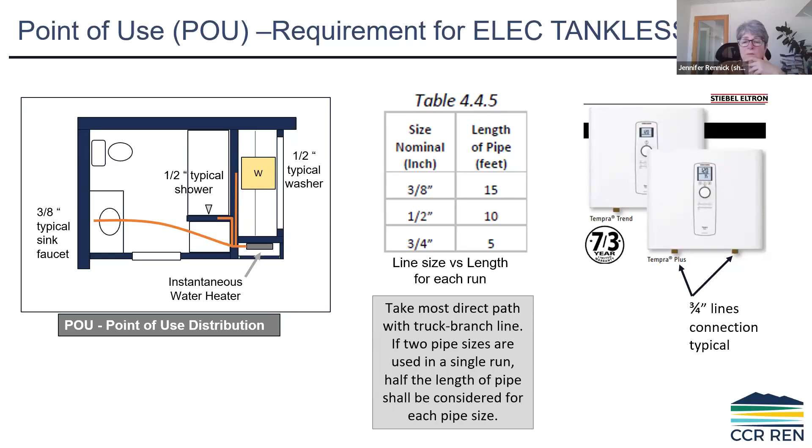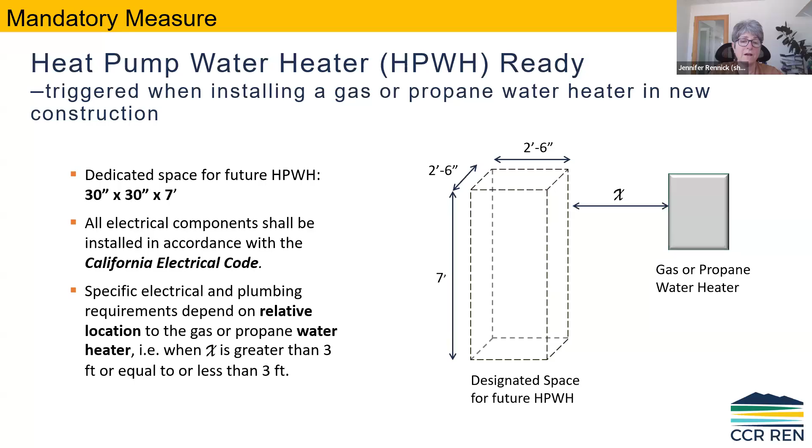For the heat pump water heater ready, assuming you do want to install a water heater that's propane or natural gas because of the space savings, even though it's an ADU, you don't have a lot of space, you still have to designate for the new construction where a future heat pump water heater could go. So reserve 30 inches by 30 inches by 7 feet tall for that, and make sure that you meet all the requirements of the California Electrical Code.

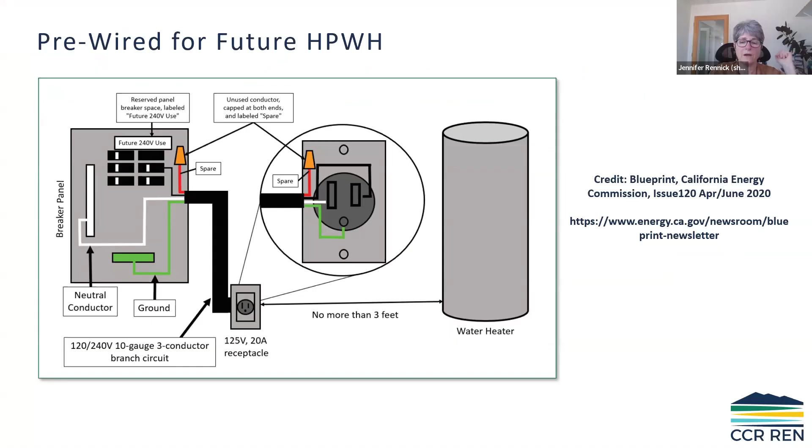And again, the Blueprint, they did a great issue back in 2020, just to kind of clarify what it means to pre-wire for that future heat pump water heater. So this is a useful diagram. I recommend you take a look at it if they're going the route of gas or propane.

Same idea here with the heat pump, only these things can make quite a bit of water. So you need to either design a floor drain or make sure the unit is close enough that that condensate drain line can be connected to an appropriate discharge or taken outdoors.

There's a few design considerations. I've included this just kind of FYI for folks, because heat pump water heaters are still relatively new. So even if you're not plans examining it or designing for it, someday you may want one. It's good to understand that they do need a certain amount of volume of air around them so they can extract the heat from that air and put it into the tank of water.

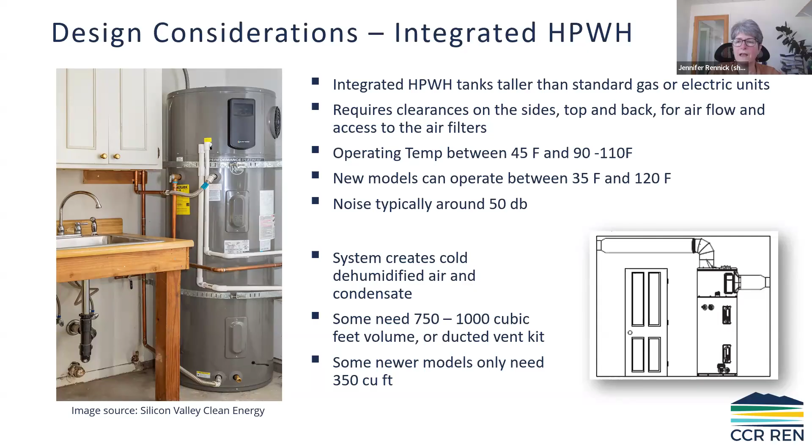They do have some noise. Typically, they're around 50 decibels, but there are quieter models out there. That's about as loud as your refrigerator when it kicks on and is running. So most folks prefer to have these away from their bedrooms. There are certain clearances to be aware of, and there are ducted kits available for these. So, for example, you could create a closet space that's approximately 36 inches wide, make sure it's 80 inches tall, and you could duct air from the outdoors into the unit and exhaust the cool air outside the building envelope.

And so what we're seeing happen with the ADUs is folks are using the heat pump water heaters to meet all those requirements, and most of the pre-approved plans include the heat pump water heater, but then in the field, we're seeing that the installers and the builders are really not having enough space for installing the heat pump water heater properly. So I want to just give you guys a heads up on that, especially if it overlaps with any of your duties coming up for the new 2025 code cycle and your plans get updated.

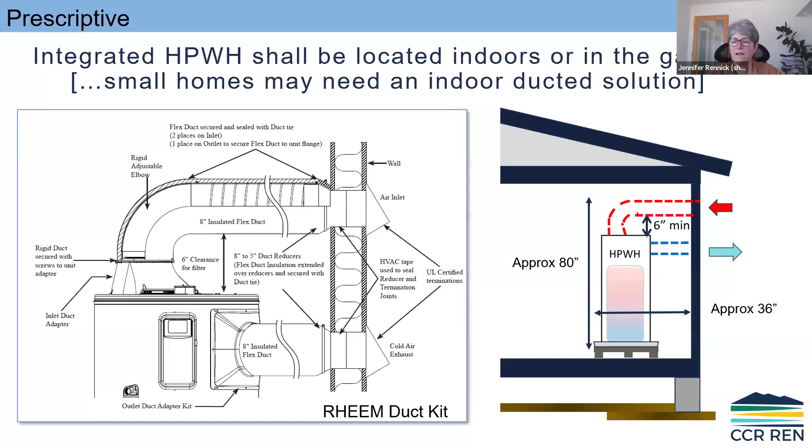Go ahead, Grant. Do you have a question or comment? Are you going to hit on the 2025 update for this, the new clarifications? Is that one of the slides we have coming up? Yeah. Okay. Yeah, I'll zip through this. No, you're good. This is all super useful.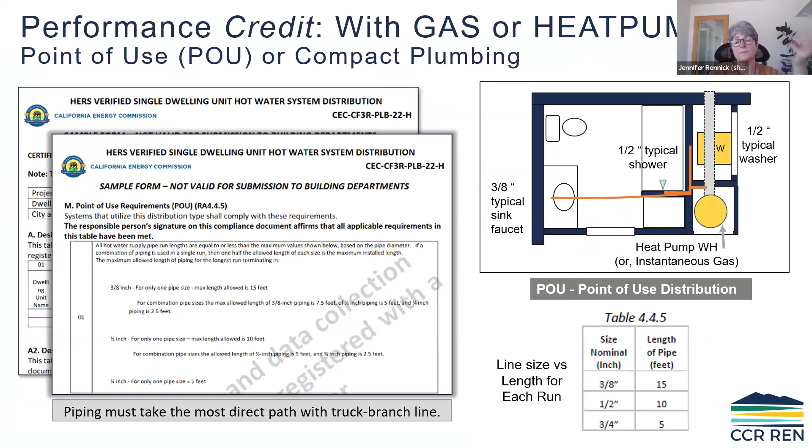Point of use distribution. Let's say you do the heat pump water heater, you do a duct kit. That's just an example of it. We still recommend that you try and do as compact or point of use distribution as possible. You do get credit for it, but also your heat pump water heater just works better.

And then some of the new 2025 code mandatory requirements are based on this field experience. It's like, hey, if you do the ducts, they need to be R6 insulated. They need to be sealed at the penetrations. And if you're not going to do duct kits, you need to do a calculation that shows that you really do have enough net-free ventilation area around the appliance to function properly.

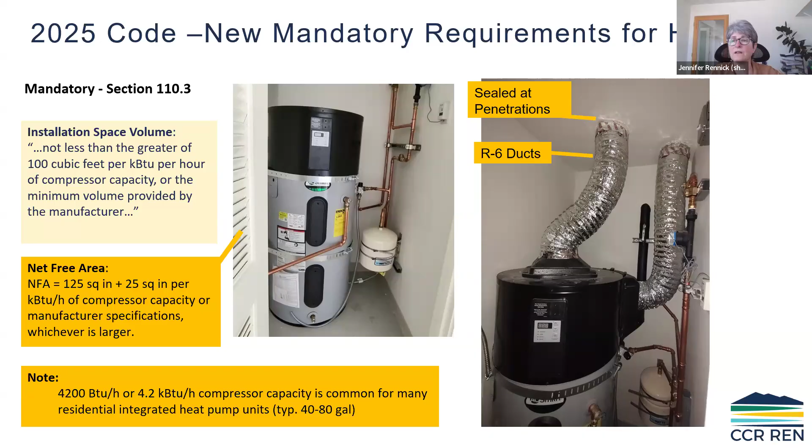And that requirement is actually based on the compressor size. Not a lot of the manufacturers are readily publishing the compressor size right now. So a 4.2 kBTU/hour compressor capacity is really common, and you could use that number to get yourself started to calculate the area. And then again, there was a clarifying diagram published by the CEC in the Blueprint specifically about how to calculate the net-free area for the ventilation in lieu of a duct kit.

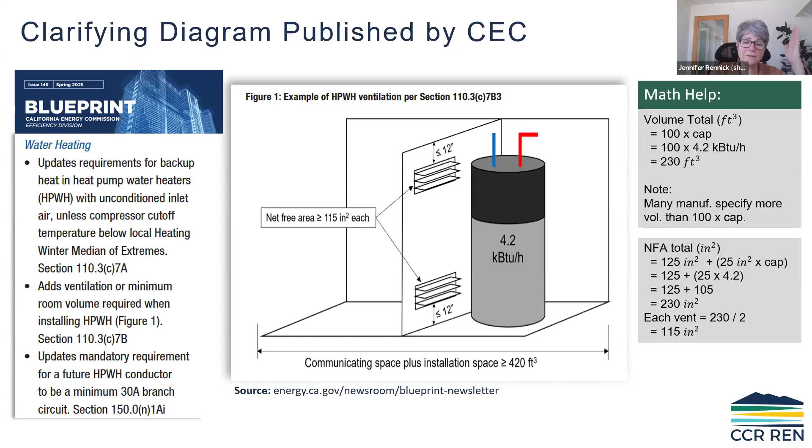So I included that, and I included some math. So you can change the numbers out and just look at that and get some math help. And also we're code coaches. We can help you with that too.

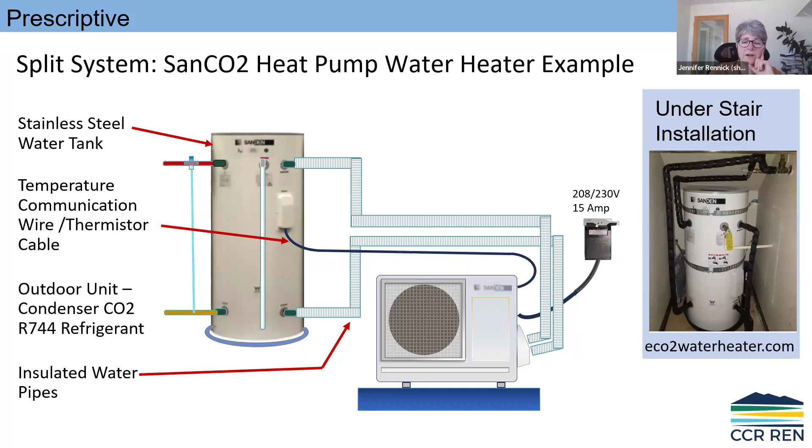There's a split system heat pump. It's a more expensive solution, but sometimes it's worth it to folks to go to this split system. The condenser compressor is outdoors, and the tank is indoors. If you have people that are concerned about refrigerants having an impact on the environment, this particular unit uses CO2 with a global warming potential of only 1. So very environmentally friendly and very quiet, as the parts that make noise are on the outside of the building. And you can squeeze these into very small spaces, which is another benefit, just more expensive.

When it comes to space heating and cooling, the biggest thing to know for the ADUs and JADUs is the ADUs need to have their own thermostat, their own heating and cooling system. For the new requirements, new construction, performance pathway, you could install a gas furnace, but that's been updated in 2025 so that for all the climate zones, heat pumps are required prescriptively. So if you do want to use a gas furnace in any climate zone now, you will have to do the performance method.

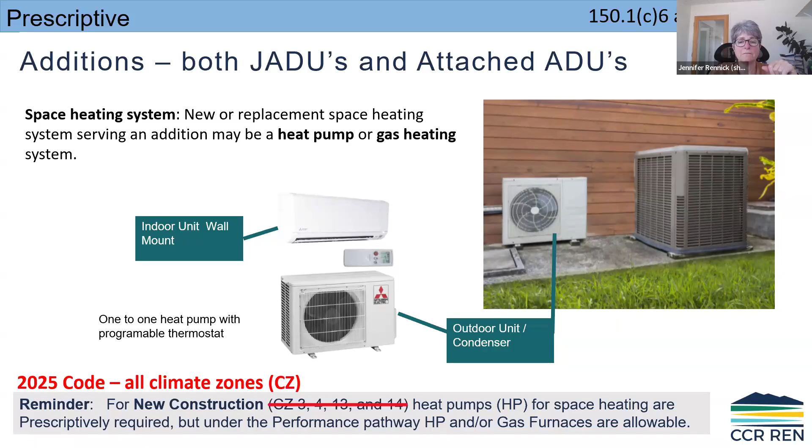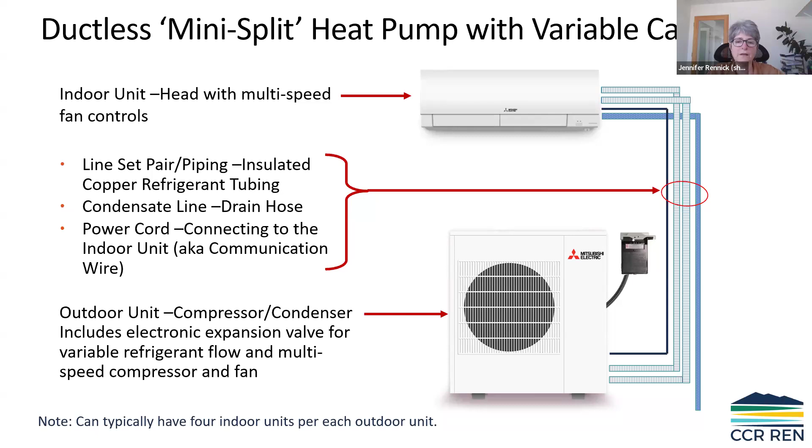The most straightforward approach we're finding for a lot of the ADUs and JADUs, if they want a separate heating and cooling system, is just to spec out a mini split heat pump that has 1 indoor unit and 1 outdoor unit. This is what they look like when they're installed in a retrofit situation. If you have a raised floor, they can run those refrigerant lines under the house and install a new condenser. The code requires that the ADU not share return air with the primary dwelling through the heating and cooling system.

So the indoor units need to be separate from each other, and each zone needs its own thermostat. Practically speaking, living with this sort of system myself, I would do 2 separate outdoor condensing units and 2 separate indoor units if I had the choice, because if one space wants to be heated while the other wants to be cooled, you end up overloading the system switching between heating and cooling modes with the various thermostats, and you can trigger some of these units to just turn off. And you have to go through a sequencing to get it restarted, and most people end up calling a professional. So if it were me and I had a renter, I would just keep them separate. That's FYI.

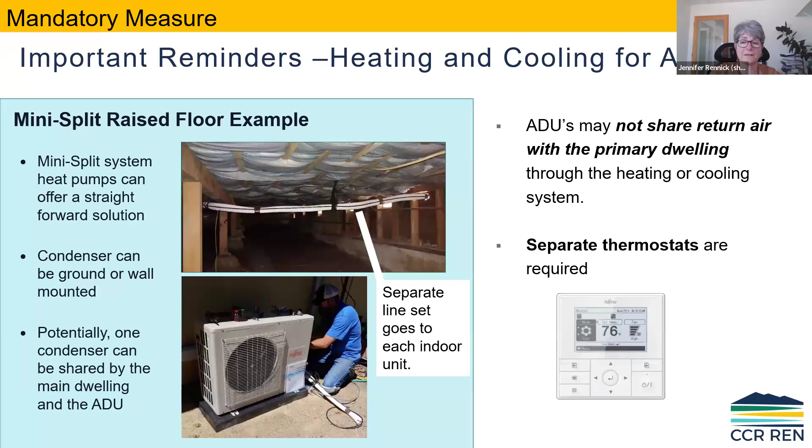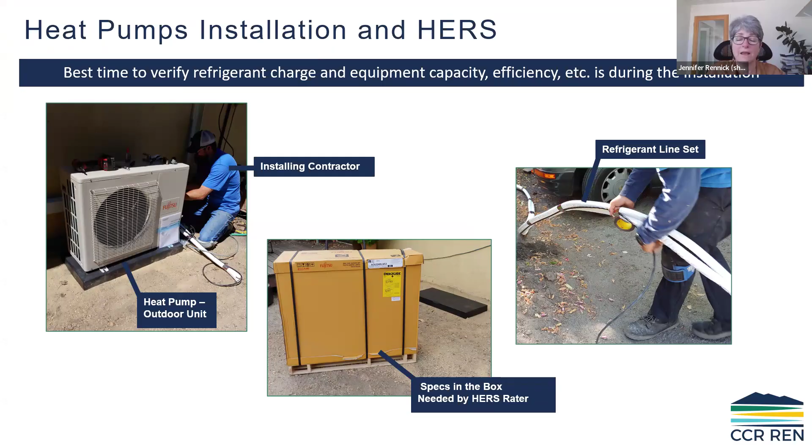The installation is quick. It's very straightforward. For new construction, or even on your addition, when you add the heating system you will need a HERS rater to come out, but they can get these things up and running in a matter of a couple of hours. It's very straightforward.

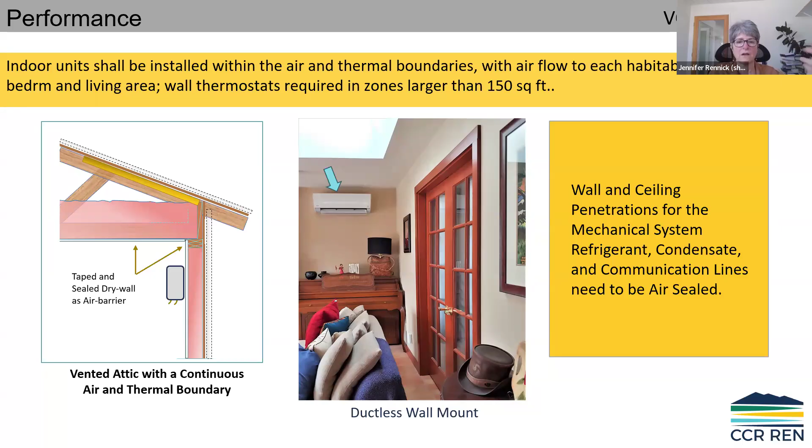These types of systems, if you're doing the performance method, you can get a variable capacity heat pump credit in your Title 24 report. So again, this is another way to kind of offset something else, maybe where the project, the ADU, the designer and the homeowner opted for much more glass than that prescriptive method I showed you. So in that case, they could use something like this and get a performance credit.

And ceiling recessed ductless options are available. And I included some of the detailing because it is important that that ductless unit be within the air boundary and within the interior space, so to speak. And that can be done by creating a drywall box that's taped and sealed over those units. And then the refrigerant line runs up to that unit and then out to the outdoor unit.

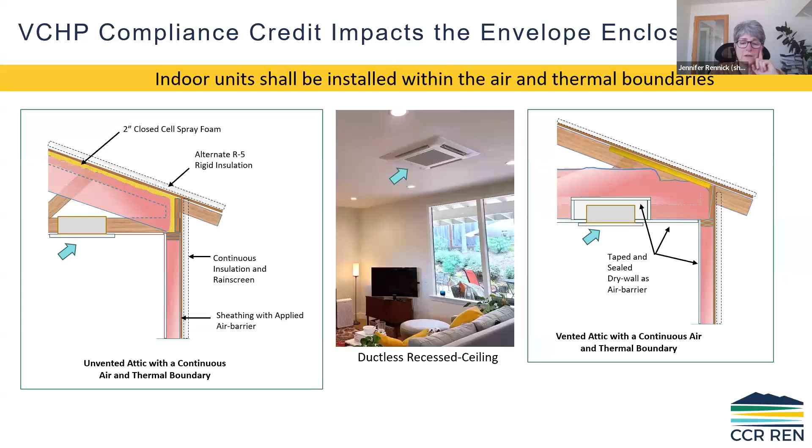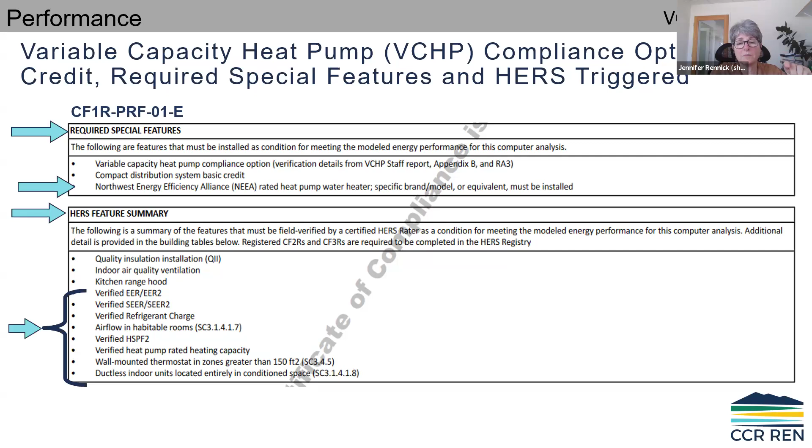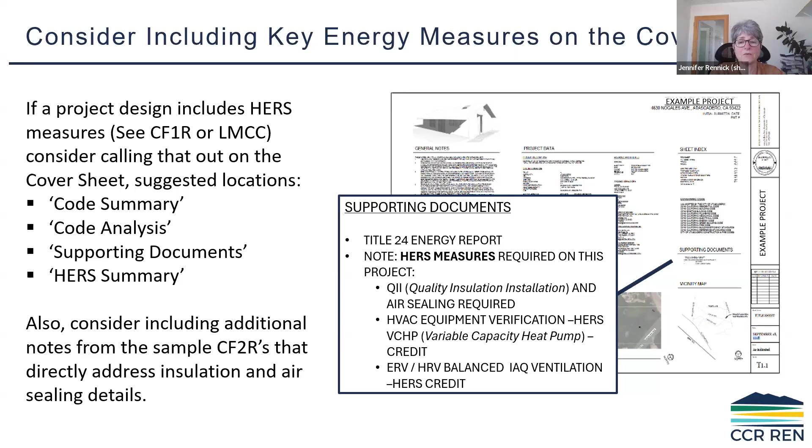And what we recommend is that this information get put on the cover sheet of the plan sets so that it's easier for the HERS rater that's going to be hired to understand what's going on. The plans examiner can see it, everyone's on board, the builder's on board, and then the homeowner, who often doesn't know about these requirements, will also hopefully really read it because it's on the front cover.

The Blueprint is also available at energy.ca.gov, and goes into the newsroom, and then the Blueprint newsletter, and you can download past references. They're very useful. And for the homeowners, a reminder that their Title 24 report will have to be uploaded to CHEERS. And then that's where the rest of the plans examination and permitting team will have access to their energy documents. And for the architects, you click on that link to get started so that you can go in and navigate through CHEERS for your HERS and your Title 24.